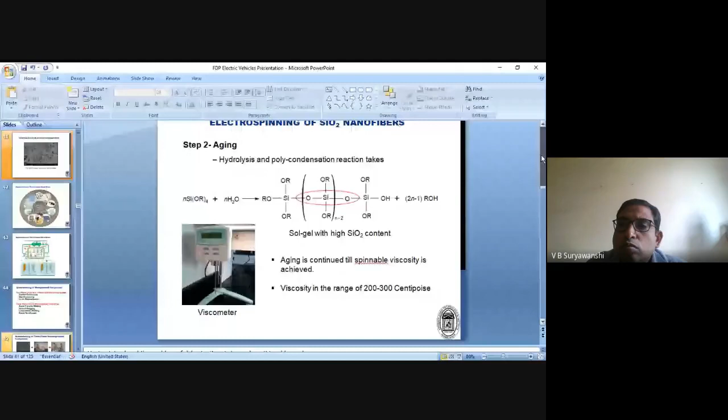Is the screen visible? The screen size and all, is it okay? Yes, sir. Please do the slideshow so that we can see. Okay, slideshow will be better.

So the title is Nano Engineered Composites, and I would try to orient it towards automotive applications. The core is composites. During my PhD studies, I focused on how to nano engineer the original composite materials, normally called fiber reinforced composites or fiber reinforced plastics. This is what the focus of my talk will be.

Basically, I'm going to go through an introduction to composites, how they are designed and manufactured, the various applications, and the current state of the art of composites in automotive engineering. Then the scope for nano engineered composites, how they are manufactured, the challenges, and how they are characterized. And if possible, I'll touch on the design aspect of both composite materials and nanocomposite materials.

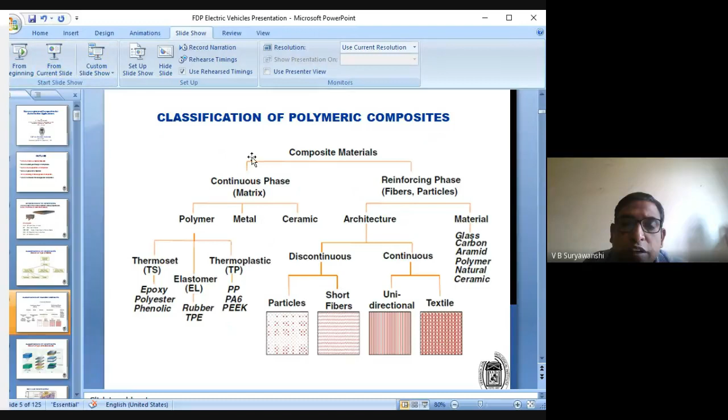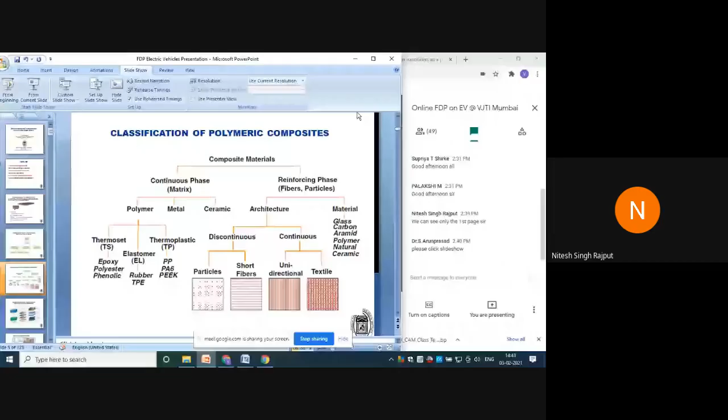Sir, sorry to interrupt. Are you presenting, sir? Because we can see only the first slide, your introduction by Dr. Suryavanshi. Okay, sorry. Maybe I started with the window presentation. Let me stop sharing and redo it. Can you see this now? Yes, sir.

Classification of the polymeric composite, that is the fifth slide. So there can be particle reinforced composites and short fiber reinforced composites. Those are discontinuous fiber composites, or discontinuous reinforcement composites. And there is one category of composites which is continuous fiber composite. The fibers can be aligned in one direction, which is unidirectional, or there can be different orientations, different designs. Those are called textile composites or woven composites.

The continuous unidirectional and textile ones give the maximum benefits of the composites. Short fiber composites, although they are used in many applications, including automobile applications, do not actually realize the benefits of the composite because the fibers are short and the load is not completely taken by the fibers. We'll come to it when we go into the detail.

And there can be different materials also, like glass fiber composite, called GFRP, then there is CFRP, then aramid fiber composites, natural fiber composites. So based on the variety of reinforcement we can also classify. General terminologies are more popular, let us say GFRP, CFRP. Unidirectional is very popular. Then short fiber composites, injection molded composites. Those are some of the main categories of composites which have a lot of applications.

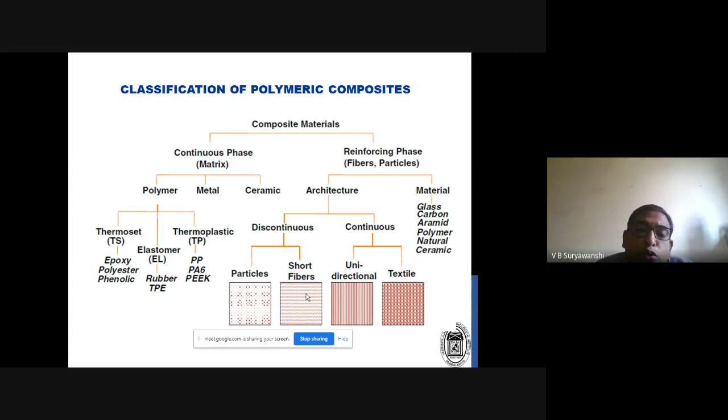So in another way, what is particle reinforced? This is how it will look like. So there is one surrounding material which is called as the polymer, and we have put the particles in that. So that becomes your particle reinforced composite.

Then short fiber, you can see here, the short fiber, chopped fibers are there, which are, let us say, embedded or mixed or immersed in the polymeric resin. Then we probably do the injection molding and get the part. So those are called as the short fiber composites.

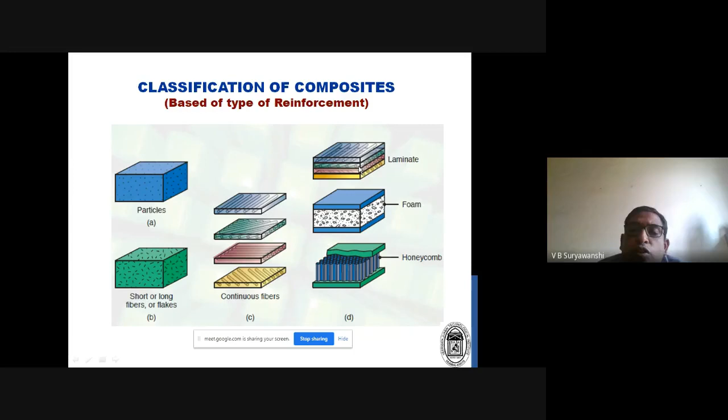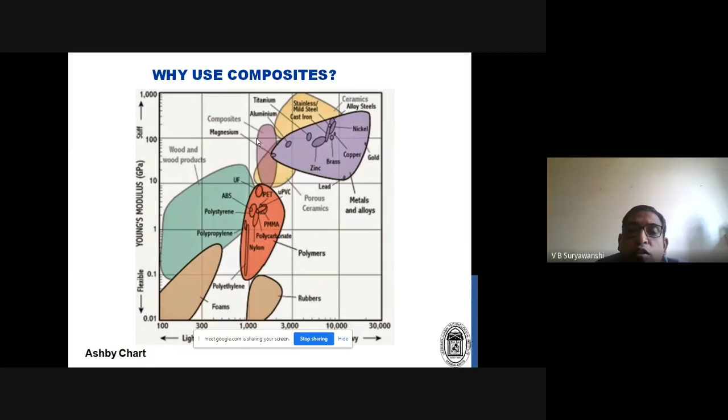Let us say stiffness versus density, strength versus density, fracture toughness versus density. So many charts are there in one of the books written by Ashby. So the concluding remark from this slide is that the composites are strong, stiff, but light. So strength to weight ratio is very high. That is the main advantage of the composite material, and that's why it is used in the aerospace industry and many other industries where they want the best performance and they are not bothered probably about the cost.

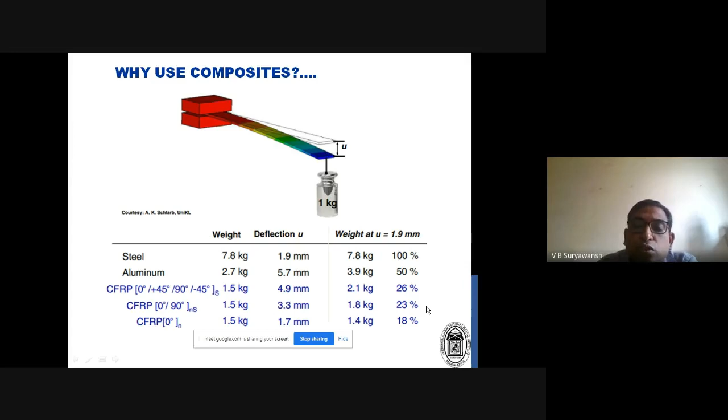Hereafter I'll be focusing only on polymeric composites, and we should know basically what is the role of each component. There are two components in polymeric composite material: one is called the fiber, and another is called the matrix or the resin.

So what the fiber does is take the major load. It provides the stiffness. So stiffness is provided by the fiber, and strength is also provided by the fiber. Stiffness and strength are two different terms, as you might be aware. When we talk about tensile strength, that is nothing but strength, and when we talk about modulus, that is nothing but stiffness. So stiffness and strength are provided by the fiber.

The toughness and damage tolerance are properties of the matrix. Toughness is when something is hit to the material, everything present in that material takes the load rather than just the fiber. So majority of the toughness, because toughness is a continuous failure phenomenon, not a single stage failure phenomenon, that's where the matrix plays an important role. As various cracks propagate, multiple cracks form, and those cracks are generally formed in the matrix. So these are matrix properties.

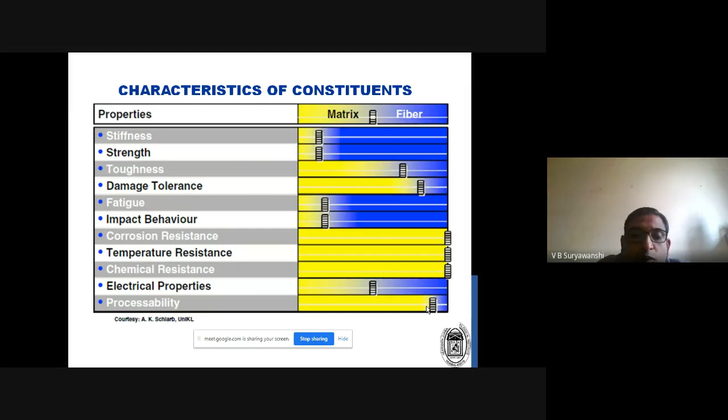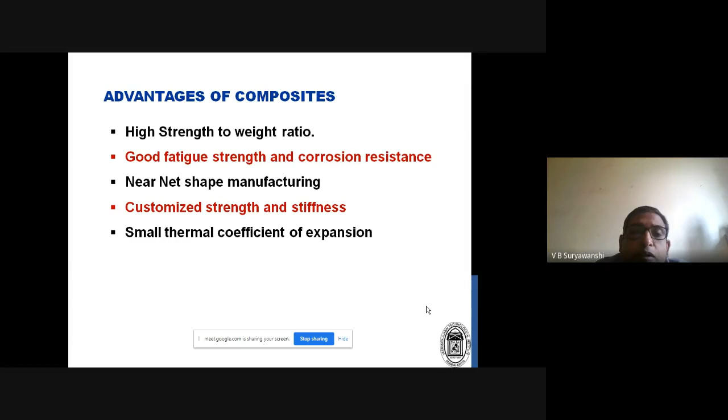So we have already discussed this: strength to weight ratio, fatigue resistance, near net shape - these are some of the advantages, and that's why we go for composite material. What is more important to talk about here is there are certain disadvantages too. Specifically, when you ask why they are not used in a variety of applications, or why they are limited to aerospace application, the first important point is they are expensive and difficult to manufacture.

Carbon fiber composites are really expensive as compared to our conventional materials. The processes also, typically the equipment and techniques - the equipment is costly and the techniques are cumbersome, so we need expertise in that.

Damage usually is not noticed, because steel and similar materials fail gradually, but composite materials fail suddenly and then there is a sudden shock. So steel fails gradually - when you pull it on the UTM, you see continuous deformation and then neck formation takes place, and after that we come to know it's going to fail. Whereas in composites, the cracks propagate and then suddenly they fail.

Then hygrothermal effects - if it is subjected to thermal effects and water effects, it has issues with that, which we have to address. Lower strength in the transverse direction - what this means is, let us assume a reinforced concrete beam: along the direction of the steel rods, the strength is very high, and across the direction it becomes very less. So that is called lower strength in the transverse direction.

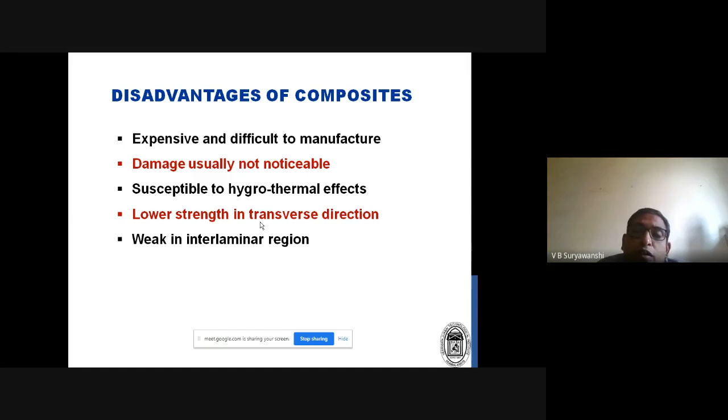And they are weak in the interlaminar region. This is particularly applicable for laminated composites. What we do is make a component layer by layer, so when two layers are joined together, obviously the weakness will be at the intersection. That is what is called the interlaminar region.

Having covered all advantages and disadvantages, let us look at the applications. There are a variety of applications. In construction, bridges are being made using composites.

In the sports industry, a lot of equipment is made of composites, because mostly high-performance equipment, like tennis rackets, are made of carbon fiber composites.

Then automobile industry, yes, there are many applications. We'll discuss in detail exactly where they are used and in what sector of the automobile. In sports industry, as said, a lot of composites are used. Then in the boat industry, a lot of boats or ships are made using composite material.

In sports cars, there are a lot of applications. Obviously Formula One and similar cars have a huge amount of composites in them. Wind turbines, aerospace - those are conventional applications where composites are used.

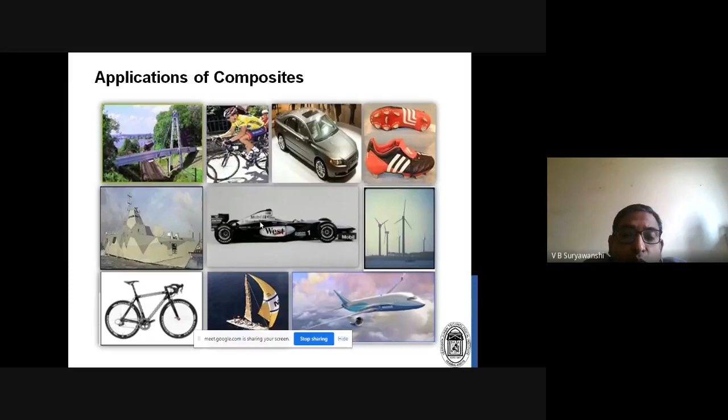Coming to our main focus, the automobile industry - a lot of composites are used here too. But considering their cost, at this point they are mainly used only in high-end cars, let's say racing cars, where maybe about 50% of the material is composites. Whereas in passenger cars and low-end cars, it is not possible to use them at this moment.

So these are applications in high-end cars. Bumper beams of some cars are made of carbon fiber composites. The crash box is a typical application where high energy absorption is needed - energy absorption in the case of composites is very high.

Flat structural parts can be easily manufactured with sandwich structure. Sandwich structure has the advantage of very good bending stiffness. Bending stiffness is required for flat parts, and load carrying capacity is also very high in the direction perpendicular to that flat surface - that is the specific advantage of sandwich structure.

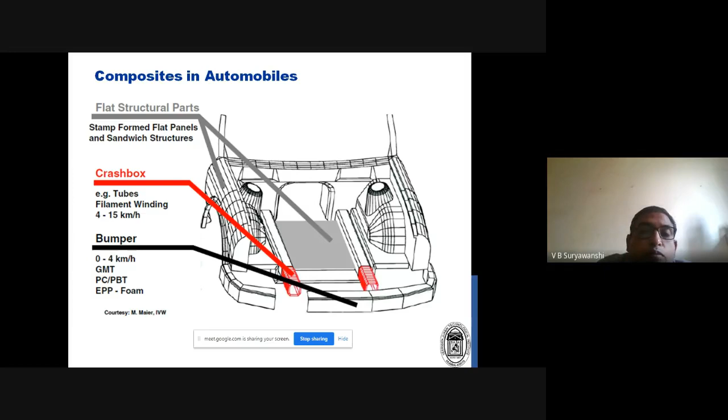You can see here all these cars where composites are being used - BMW, Nissan - they are not bothered much about cost. They are more focused on performance.

There are two main categories of composites used in the automobile industry. Most of what you see here are called continuous fiber composites. The safety seat and side door structure, as seen in the BMW, are made out of continuous fiber composites.

When I say continuous fiber composites, the fibers are in the form of a mat, like our cloth, and a layer-by-layer structure is made to create a composite. That is one category giving the highest or best possible performance among composites. The second category is short fiber composites.

Those are used in many cars because these parts are injection molded, and injection molding is comparatively a very cost-effective process compared to other composite manufacturing processes, which are typically made in autoclaves and big ovens - those are costly processes.

So when we talk about composites in automobiles, remember that for structural applications, such as the BMW safety seat and door structure shown, there is cost involved. However, the second category, injection molded parts, we can still work with, and we should definitely go with such composite parts in the automotive industry.

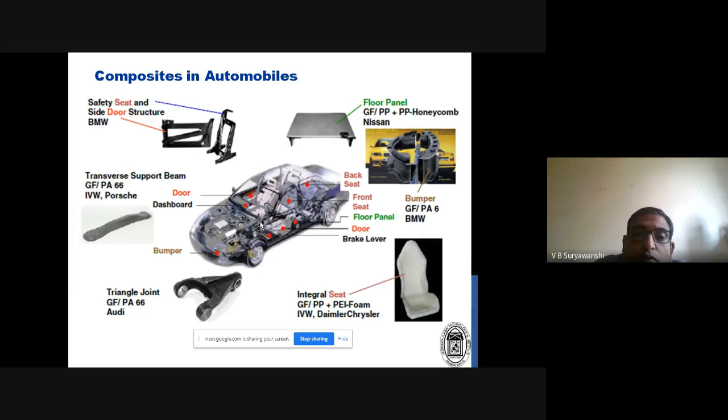This slide shows various other parts made out of composite. Door panels - a lot of manufacturers are going for this. Then the dashboard, typically molded parts, so injection molded short fiber composites will be used here.

Under body panels - almost 11% of parts are used there. Then noise encapsulation, under-hood components, door sills, tire holders - all these areas where plastic is currently used have great scope for short fiber reinforced composites.

Other parts, like body panels, can go for long fiber composites, provided the manufacturers are able to minimize or cope with the cost in the car.

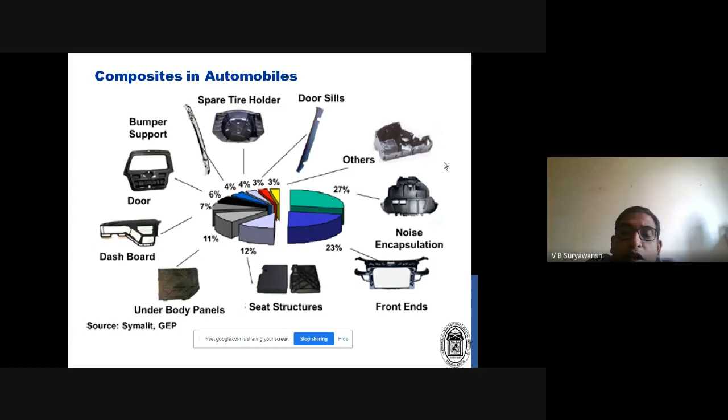To summarize, why it is so important under the current scenario for the automobile industry to look at composite material: lightweighting is one of the top priorities of the automotive industry. If you can reduce the weight of the car, you can save on fuel, and that makes it a more attractive option for the manufacturer or the customers. So lightweighting is the number one challenge for the automotive industry, and composite is the most possible solution for that.

In similar fashion, when you are going for electric or hybrid vehicles, again you want the weight of the car to be less. So lightweighting is one of the major focuses of all automotive developers and manufacturers. When we talk about lightweighting, one of the best candidates is composite material. But there are challenges, as I said. We'll focus on those challenges and talk about possible solutions in the next few minutes.

So when you want to suggest possible solutions, let us first understand what are the problems and what are the processes. First I'll talk about the manufacturing of composites, explain what the challenges are and where the cost is involved, and then we can suggest possible solutions for them.

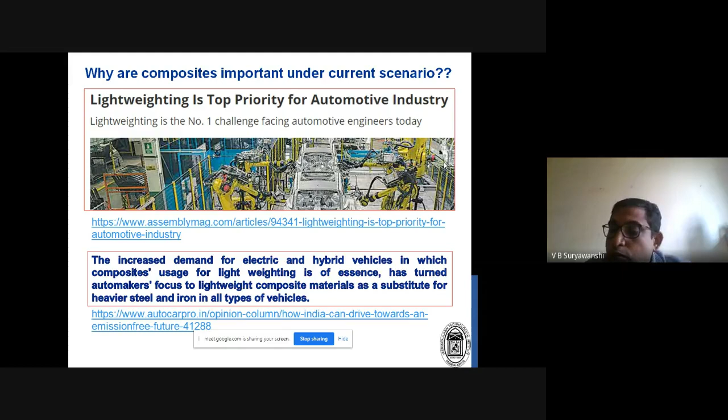So we mix them together, and along with that we want some kind of reinforcement, like in reinforced concrete. We have the concrete with us, and then we need reinforcement in terms of steel rods or any steel material that is there.

With that we can prepare SMCs. SMC is nothing but if you mix the chopped fiber with the resin and make a sheet out of that - a semi-solid sheet, we generally call it - and then we make a composite out of that using compression molding or any type of pressing operation. So that becomes the composite.

Or if you are using long fiber composite with the resin, we make a pre-preg. Pre-preg is similar to what in our general terminology we call the half-cooked composite. We mix the resin with these fibers, and we do not heat it to the final stage. Instead we heat it to, let us say, 50%, and at 50% we save that resin in the half-cooked format. Then when you want to make a composite out of it, we finally heat it to its cure cycle or cure temperature, and then we can make a composite.

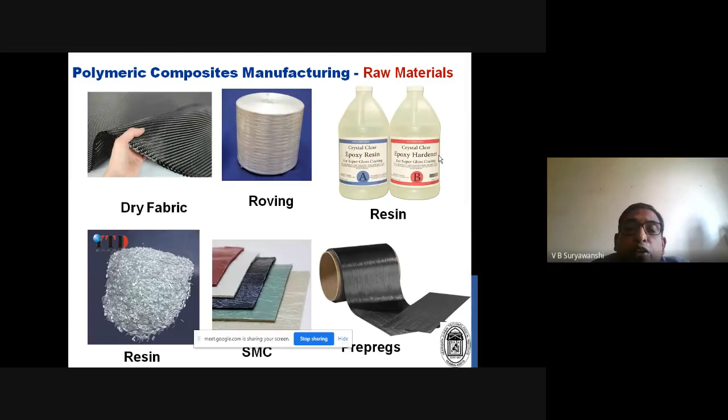The film is made of the resin or the polymer, whatever you want to use there. These two things are pressed against each other. So finally, the final product will have the film, and in the film we have reinforcement in terms of the chopped fibers. That becomes your SMC, sheet molding compound, as it is called.

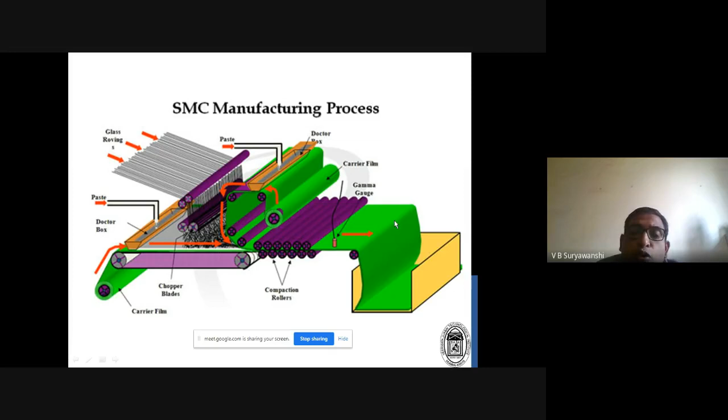So prepregs are manufactured like this, a simple process, but we need a lot of chemical control there because we don't want to cook it beyond a certain limit, and that chemical and heat treatment is a very important aspect. So prepregs are manufactured by very limited manufacturers because the chemical control required is very high in this case.

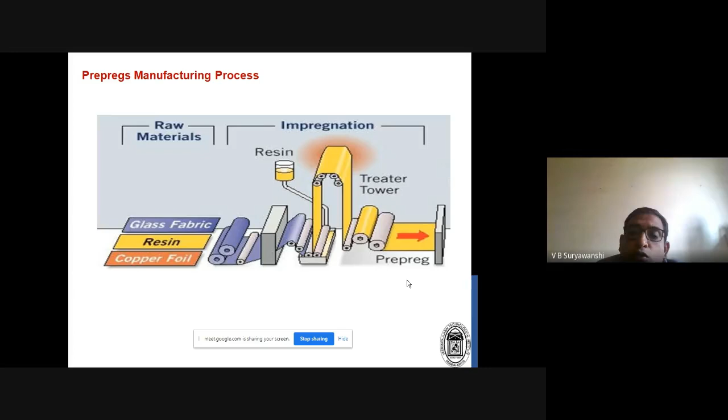In the pultrusion process, we make a long part and there is a die. Suppose you want to make a pipe, you could go for pultrusion, but instead of a pipe, let's say a rod. Most pipes need strength along the radial direction, whereas pultrusion parts specifically have strength along the length direction. So pultrusion is used for beams, rods, poles. All those things are made by the pultrusion process.

And then there is injection molding, a standard process used in other industries as well, and mainly used for manufacturing reinforced plastic composites for the automobile industry. Injection molding is a very common manufacturing process for automobile parts. There is a resin, they mix in short fibers or particles, and then, say we want to make a dashboard, we'll have a mold of the dashboard shape, and it can be made using reinforced polymer or short fiber composite material.

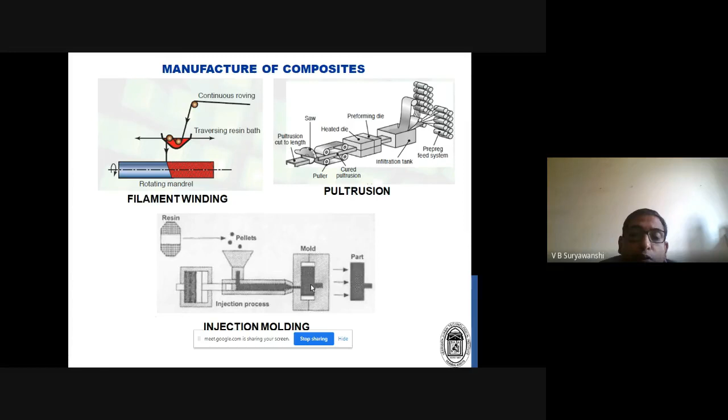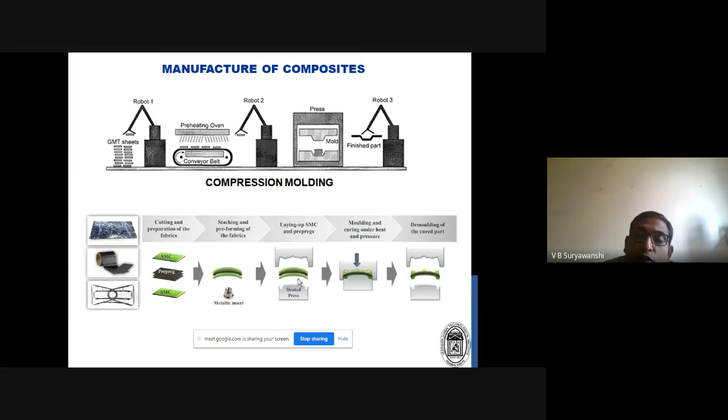One of the best advantages of composites is tailorability; we can customize it. The strength can be customized very easily. If you want strength in a particular direction, we can align the fibers in that direction. If you want strength at a particular level, suppose in the beam you want strength at the top and bottom, we can use the stronger material there because we are building a layer by layer structure.

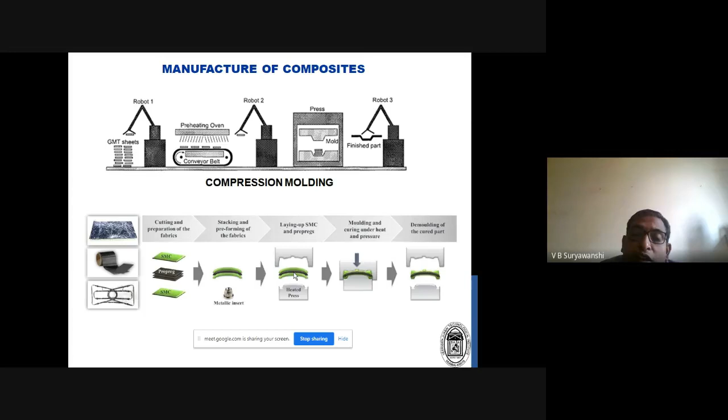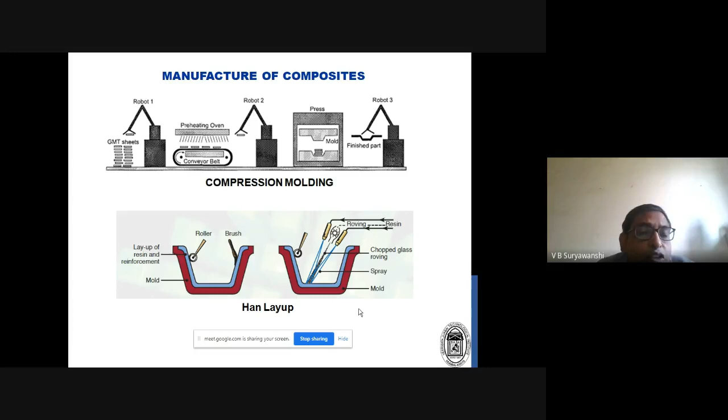So whatever fabric you want to use, or the chopped glass roving, based on whether you want to go for the chopped fiber composite or the long fiber composite. And then with the brush or roller we can just paint it with the polymer or the resin. These parts are used in many, let us say, low-end structural applications. When I say low-end structural application, these parts are not subjected to very high strength, or they are not the

main structural members. So if there is a little bit of an issue in the manufacturing, let us say there are voids, we are not always sure that the resin will reach everywhere when you are doing it with the paint or the brush. So there can be some discontinuities and all those things. So hand layup parts do not possess much strength as compared to the other manufacturing processes.

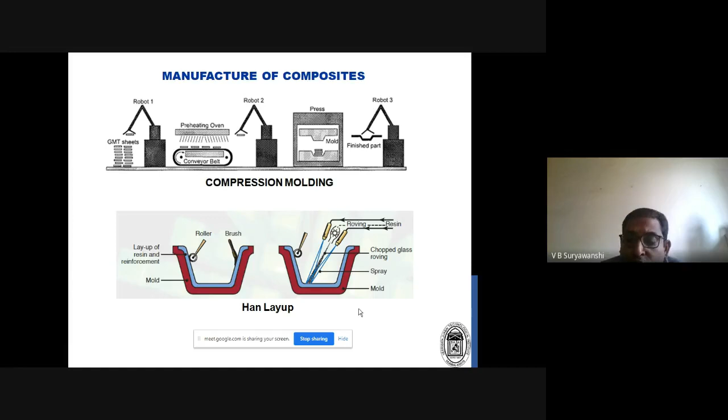So basically, it is an oven plus pressure equipment. It can undergo pressure, so a lot of pressure can be there to compress. So compression is the main factor when you want to have high strength composite applications, because we can apply the pressure there and then all the voids or the air comes out of the mold. Generally we have a closed mold and then we can take out the air from that.

So for this kind of application, pressure is required, and if you want to have a huge oven with very high pressure, the energy consumption for such equipment is very high. So autoclave is very costly in terms of energy consumption and the original cost. So that's why this is specifically used in the aerospace industry, and probably some high-end car manufacturers, let us say sports car manufacturers, who want very high performance, so they can go for such a costly manufacturing process.

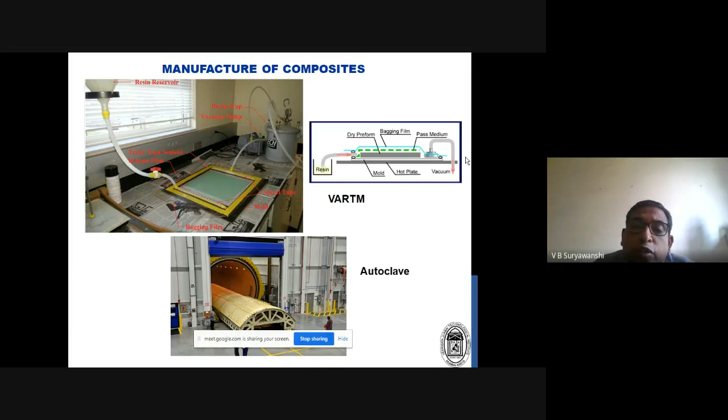Next process, we just want to compare it with the VARTM or the RTM. RTM is a slightly different version of the VARTM. Instead of a vacuum, they are applying pressure there to infuse the resin. So a high pressure resin pump is used, and whatever is the cavity, that is filled with the pressure. In case of the vacuum, the resin is pulled into the mold cavity.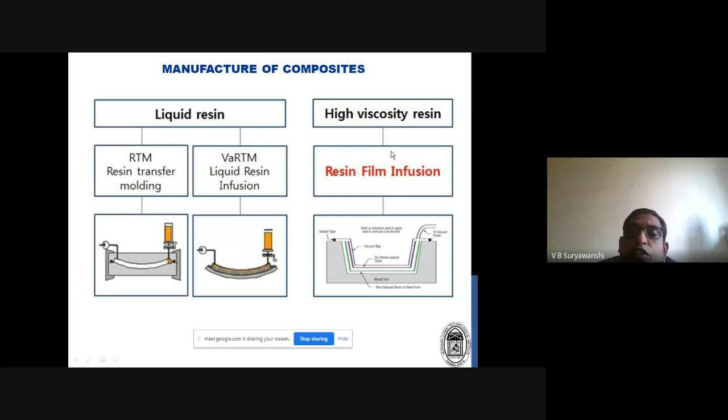Okay, so these were some of the general or most popular processes. There can be a variety of other variants. Now, what commercial manufacturers or product developers are doing is coming up with solutions, especially for automotive parts, where some cost reduction is done compared to the cost for aerospace. So they are coming up with standard solutions or individual applications by themselves. So this is one of the product developers who provides the material for car manufacturers.

What they do is provide prepregs. Prepregs are provided, and the mechanical performance is equivalent to the autoclave. That is the major thing when we are going for composite applications, especially long fiber composite applications for the automotive sector: mechanical performance similar or equivalent to the autoclave. Autoclave, as I said, is used in the aerospace industry, is a costly process, and the main reason they are getting performance is the process. Autoclave eliminates all the manufacturing defects, and that is what is required in applications such as aerospace. They don't want any chance of failure.

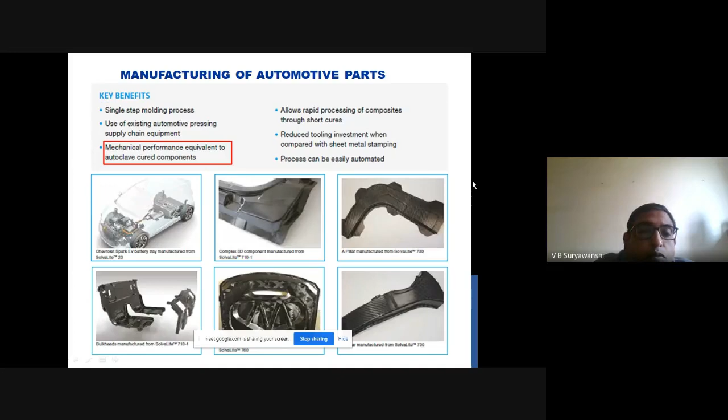But now other approaches and processes are being developed so that we can get similar performance. One of them is prepregs with certain modifications, let us say in terms of the cure cycle, the polymer that is used, or reinforcing the polymer with some additional material. So modifications are being done to come up with solutions for the automotive sector. These are some of the parts made of composites for the car. Car doors are manufactured with composites. These are real applications, used in some cars already. But the cost is obviously high, as you can see with the BMW GTS. The cost is involved with the composite material here.

Fine. So in terms of cost, if you compare relatively with the aerospace application, on a scale of 0 to 100, we can take the cost of the aerospace component to be 100, and molded parts, not long fiber composite parts, can be around 10. So currently most applications, typically in mid-range cars, are focused only on injection molded parts. So can we increase the strength of the injection molded plastics used in the automobile sector with some kind of nano engineering? We'll talk about nano engineered composites later.

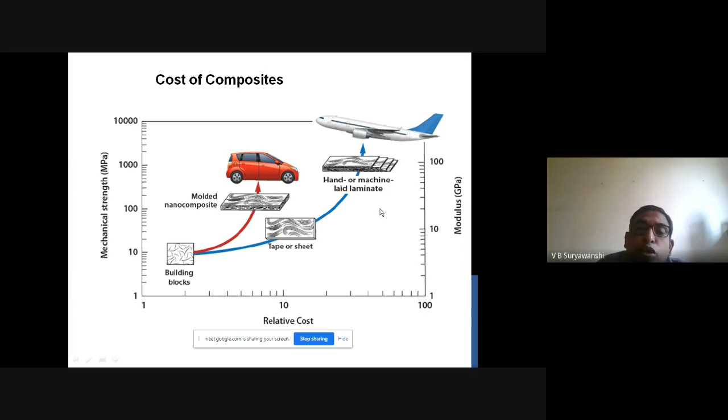Nano engineering means adding some kind of nanomaterial to the plastics and increasing the strength of the existing plastic used in the automobile. Mostly the under the hood components or the dashboards use a variety of plastics. Nylon 66 or nylon 6 is one of the most commonly used, and people are trying to improve their strength. So the cost is not much; it will slightly increase. But if you really want the maximum benefit of the composite, we'll definitely have to go for long fiber composites, like the door panel. The door panel is made of long fiber composite here.

Okay, so what we discussed so far is, yes, there is a scope for composites in the automotive sector. Currently, they are mostly used for high-end cars, where the cost can be borne. In low-end or middle-end cars, the composites used are typically short fiber composites, wherein there is not much cost involved in changing from the current plastic, let us say a polymer like ABS, to the reinforced plastic. Reinforcement is added in terms of some kind of fiber, chopped fibers. So that's the current scenario in the automotive sector.

So what is the solution? If you really want to go for composites, or improve the penetration or utilization of composites in the automotive sector, what are the possible solutions? That's what we want to talk about here. In the first part we discussed composite materials, or polymeric composites, where they are used currently, and what the limitations are. Nano engineered composites is one of the solutions proposed here.

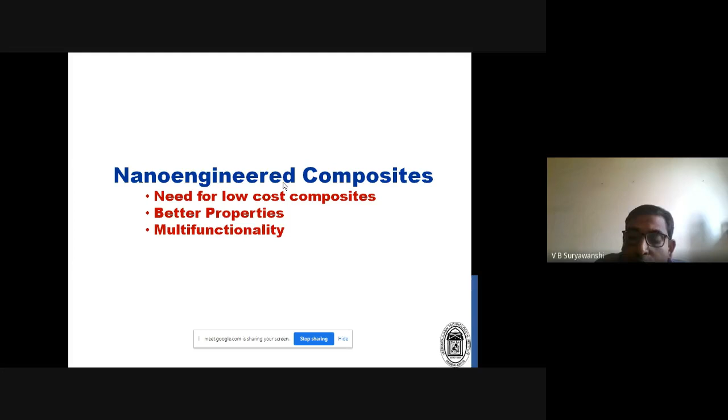I think we are left with another 20 minutes probably. Yes, sir. Yes, sir.

I mean, the stage is very clear. We have made a statement that there is a need for improving the properties and bringing down the cost. That is the basic requirement, and that's where we are looking at nanomaterials as the prospective solution. When you talk about nanomaterials, you always start with what is nano, right? They are very small, 10 to the power minus 9 meters, so 1 meter divided by 10 to the power 9. That small dimension is 1 nanometer.

And you can see how far it is. Let us say the head of a pin is 1 to 2 mm. We divide that by a further 1000, and then again, and we come to 1 nanometer. So in the nanometer range, the dimensions are really small. The diameter of human hair can be compared; it is in terms of microns, 10 to 50 microns. A micron is 10 to the power 3 nanometers. Sorry, millimeters will be divided by 10 to the power 6, and here 10 to the power 3.

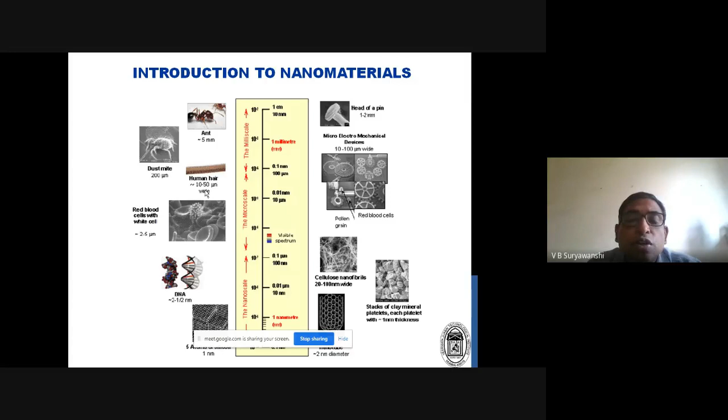So a lot of attention has been given in the last 20 years to them, and there is a lot of spending on research. And after 20-25 years, some good results are coming out. They are typically classified as 0-dimensional, 1-dimensional, 2-dimensional, or 3-dimensional. So 1-dimensional: its diameter will be in nanometers, but the length can be in millimeters or centimeters. 2-dimensional: any two dimensions, like width and thickness, can be in the nanometer range. In the case of a 3D or bulk material, nothing is in the nanometer range, so that is bulk material. Zero dimension is a particle, which has all its dimensions in the nanometer range.

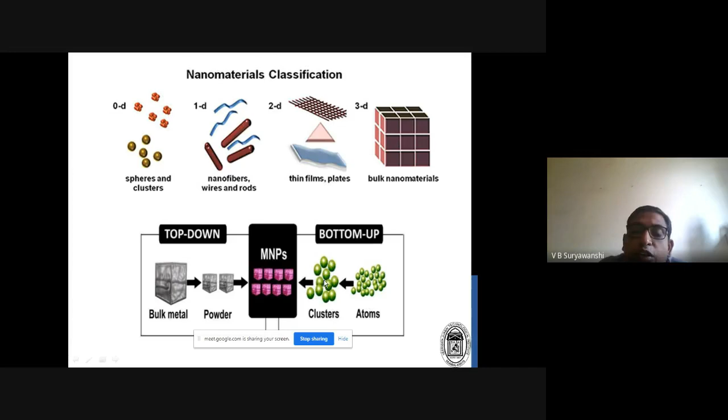How are they made? They are made in two different fashions. Either we take bulk material and crush it into fine particles, or we join individual atoms to make a nanometer scale object. So these are the top down and the bottom up approaches.

Why nanomaterials compared to other materials, let us say bulk material? If you look at carbon nanotubes, the tensile strength is 30,000 megapascals. Steel is about 1000 megapascals. So 30 times the strength of steel. That's the beauty of these materials. There are many other materials which may not have the same strength as carbon nanotubes, but they are better than their bulk counterparts. If I make a polymeric rod of 1 centimeter diameter, and the same thing at 50 nanometer diameter, the smaller one will be stronger in terms of tensile strength or tensile modulus, because due to the size effect there is purity involved and there are fewer defects.

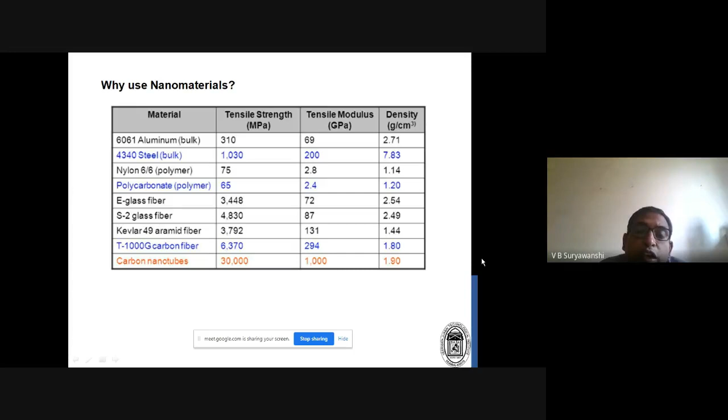So nano engineering or nanomaterials can be used for a variety of applications. There is a big list, and most of them these days are looking at functional applications, like wear resistance or anti-reflective coating. The part will give you strength as well as some additional properties. Electrical conductivity is a functional application. Our focus here would be on structural applications: how do we get additional strength with the help of nanomaterials or nano engineering?

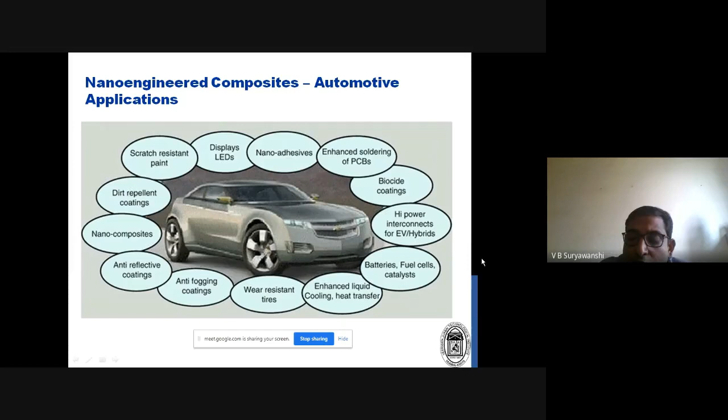In the automobile sector, nano engineering started quite early, in the 1990s. The specific material used there was nano clay. Nylon 6 was reinforced with nano clay, and they got a very good improvement in strength and stiffness. In most American cars and high-end cars, the injection molded nylon plastic parts are reinforced with clay, and that has been in practice for a long time. Similarly, polypropylene can be used along with clay. Nylon 6 with carbon nanotubes is used in some vehicles, and many nanocomposites are being used in Chevrolet cars.

So although nanocomposites do not have that much market share or utilization in all cars, they have become practical. Initially, when they started 25 years ago, they did not know the scope or actual applications of nanocomposites or nano engineering, whether they would be used or not. But applications have been developed, and it has become reality after 20 years.

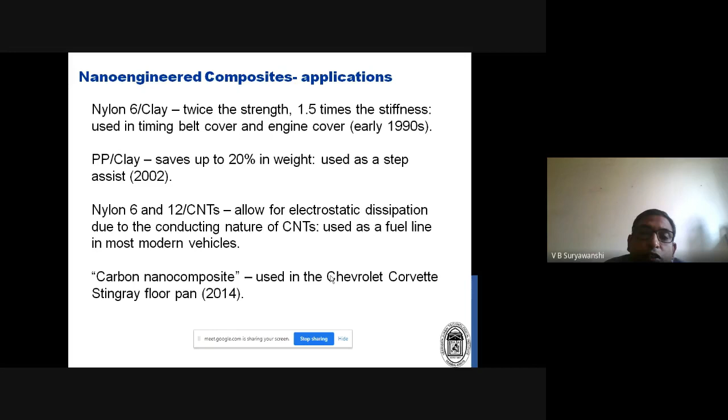Okay. So this was general so far. Let's get specific with how we can use nanomaterials in composites and how we can improve the properties. As we said, there is a need for improvement in properties, and a need for alternative low cost manufacturing processes. We'll focus on these two things in the next few slides to come up with possible solutions wherein we can use nanocomposites in many automobiles.

So how do we manufacture nanomaterials? Typically we are talking about nanofibers here. Electrospinning is the process used, a very simple process. In the syringe there is a polymeric liquid. We create a large voltage difference between the syringe and the plate, which is the collector. Due to that, the liquid is pulled into small fibers. Those fibers get collected, and we call them electrospun fibers. A number of polymers are being electrospun.

So the beauty of this process is it's very easy compared with any other nanomaterial manufacturing processes. We'll see thousands of papers are there in the last decade, and applications of electrospun nanofibers are numerous. So it's a very easy process, and those who want to start research can definitely go for such a simple process.

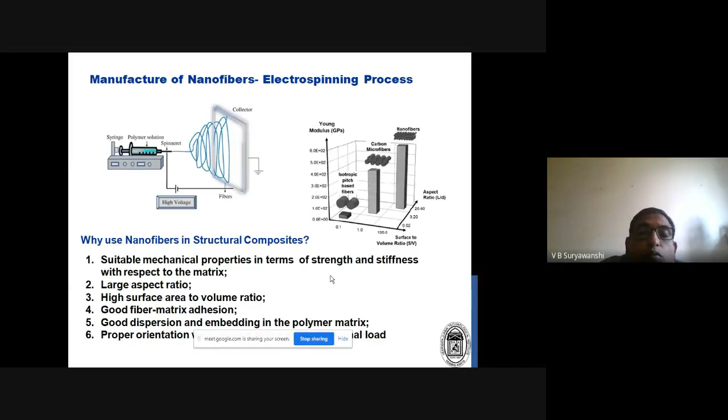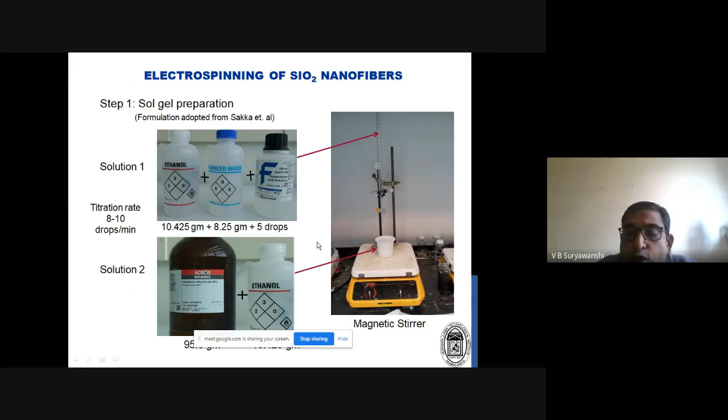Specifically, how this is manufactured - the electrospinning process - is what is shown here. We make up what is to be put in the syringe, that is the solution we make, and then that solution is electrospun. There is a chemical reaction involved with that, and finally we can see the actual manufacturing process here. On the sheet, on the collector plate, we can see that there is a deposition.

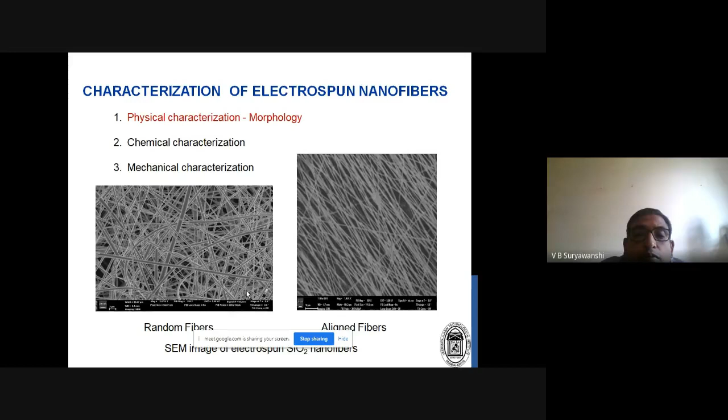So this is the SEM image of electrospun glass nanofibers. Now these nanofibers, as I said, are used in a variety of applications. Typically, if you start with scaffolds - scaffolds are nothing but for bone. If you want to create an artificial bone, we need some structure to hold the surrounding soft material, and that is called a scaffold. So scaffolds generally provide structural support for any application.

Then energy storage - solar cells and electrospun nanofibers are extensively researched as high energy storage elements. Sensors, then in biomedical applications, dressings and so on. So what is the advantage here? The electrospun nanofiber can be made out of a variety of materials. And then we can probably add some medicines into the nanofibers just by mixing them in the liquid, and we make a wound dressing or wound pad out of that.

So that can be easily used to treat wounds. Wound dressing is a huge application. Fuel cells, batteries, solar cells - a whole variety of applications. If you see the research on electrospun nanofibers, it is growing like anything. And typically the manufacturing process is easy, which is why people find it very useful.

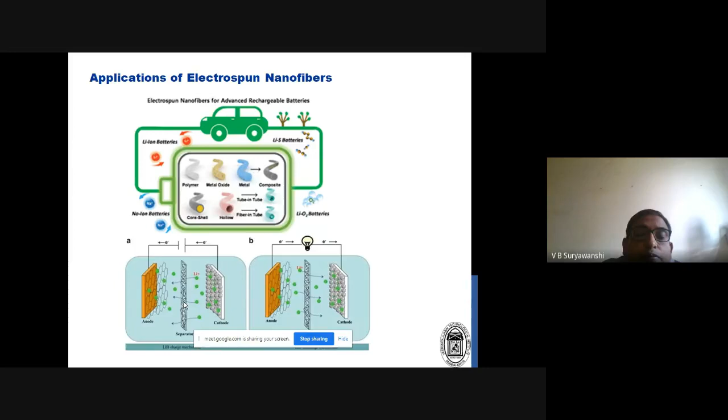Okay, so in the next few slides, what I'll explain is how these nanofibers can be used in the manufacturing of the composites. So there are two types of composites we are manufacturing.

Two-phase composites, wherein these nanofibers will be mixed with the polymers - we call it the two-phase composite. And the three-phase composite, these nanofibers will be mixed with the fiber reinforced composites, which already has regular size fiber and the polymers.

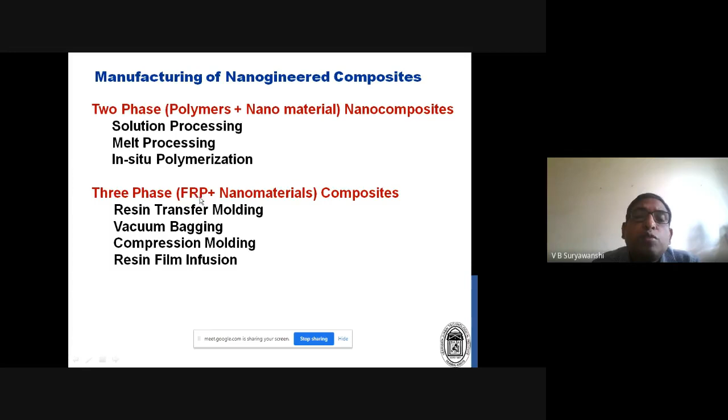So we can chop these nanofibers with the help of some kind of chopper. We can do the solution mixing - there is a liquid there to mix with the solution, let us say ethanol is used here. It is called the solution mixing process.

After chopping, we can get some fibers like this. Then we mix up with the polymer, let us say epoxy resin, and finally we get a modified resin. So this is called the nano engineered resin - we have mixed the nanofibers with the resin.

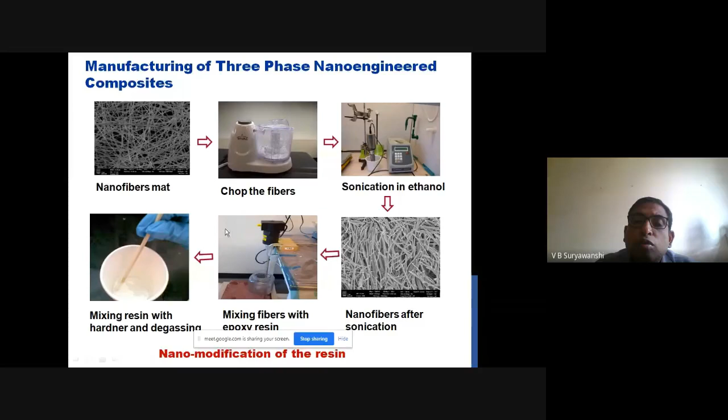What will happen? Nanofibers are strong, the glass material is strong, it will improve the properties of the resin. Polymer generally is weak among the fiber and resin. By adding the small nano size fibers to the polymer, we are improving the properties of the resin.

Now that improved resin is used in the polymer fiber reinforced composite. So what we do, the fabric is laid up here, fabric layup, and this modified resin is given as the input, and it mixes with this fabric and we get a composite like this. So this is called the composite using the nano engineered resin.

What is expected? Due to the improvement in the properties of the resin, we should get better performance or better mechanical properties for the composites. And that is what happened here.

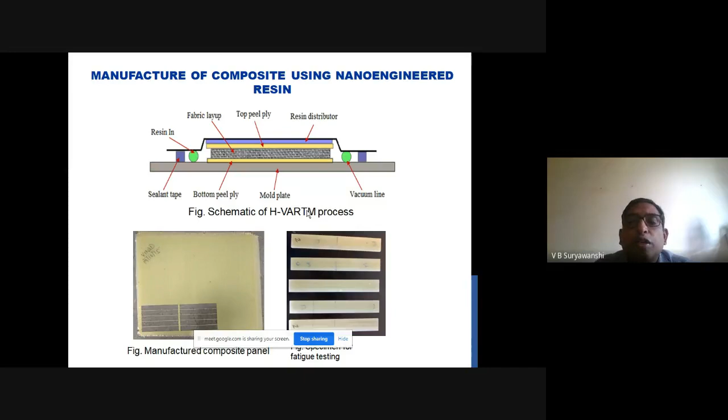So if you can improve this performance further, let us say if you use stronger materials like CNT, carbon nanotubes, and the process that we used is very simple - this process is the H-VARTM process. It comes under the low cost manufacturing process. So with the low cost manufacturing process, go for the nanomaterials and get performance comparable with the high cost manufacturing process. That is the approach for the nano engineered composite.

In another application, instead of chopping those fibers, we simply put the electrospun nanofiber mat. The mat is nothing but like a cloth, correct? So we deposited it on the collector plate, and that is how we made a nanofiber mat.

If you can put it on the resin film, what will happen? These two things will join together, and then there are the various prepregs. Prepreg is nothing but the one which has resin and fiber both. So in between the two layers, as we had mentioned earlier, the composite is generally weak.

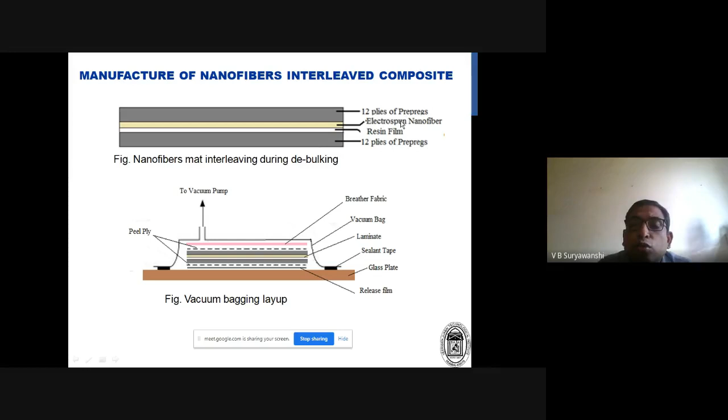So if you can reinforce that region with the help of the nanofibers, we should be able to get improved performance. So how do we check the performance?

Treatment is something we do to have proper bonding with the polymer. This nanofiber mat is chemically treated - some chemical agent is applied to it, so that is called the silane treatment. So without treatment and with treatment, that kind of experiment we had done.

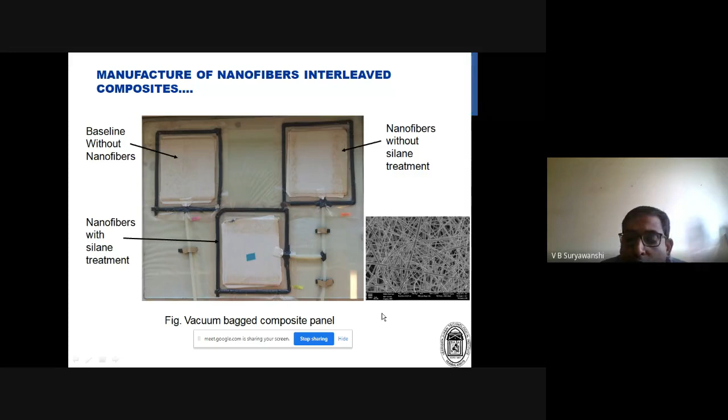And then we made 3 composites and we tried to understand whether it improves the performance. What kind of performance are we interested in? Whether they separate easily, whether their separation strength is improved.

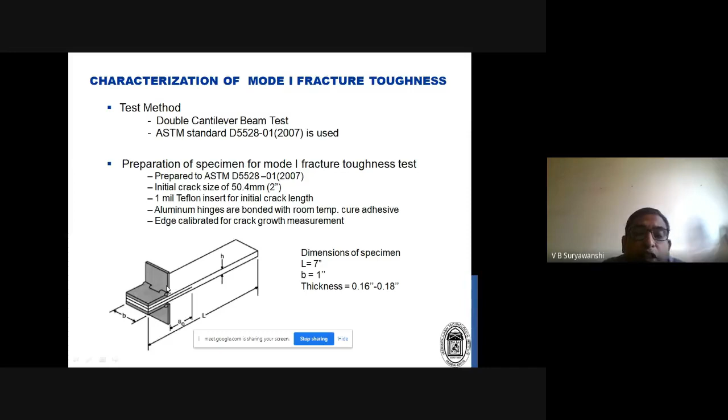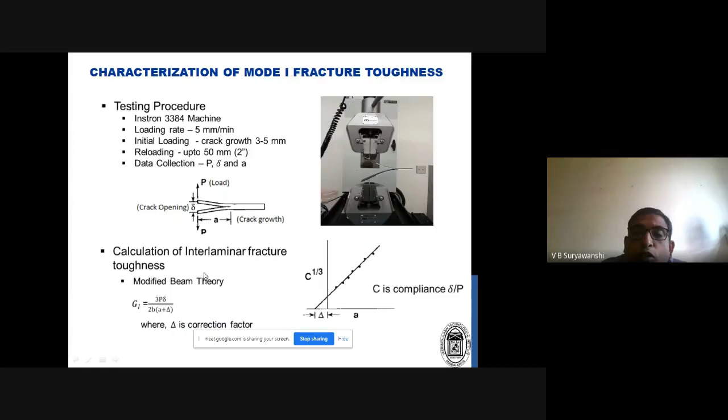This shows that if you use the nanofibers, we can improve the separation performance. These composites will not delaminate easily. So there is scope for better properties, and we can go for a variety of configurations and materials to get better performance.

Lastly, what we saw is when you put those dry fabric electrospun fibers in between the two layers, there is no proper wetting of the nanofibers. So how do we solve this problem?

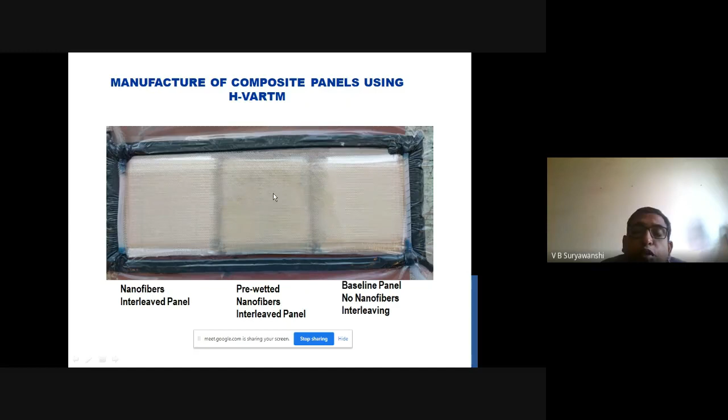What we had done is we applied pre-wetting. Pre-wetting means this nanofiber mat was soaked in the resin, and that improves the resin infusion, which helps in improving the performance. The pre-wetted fiber showed better performance.

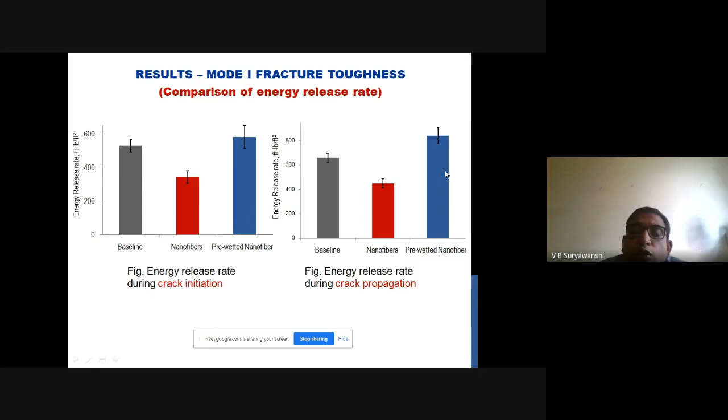With pre-wetting, we can see good fracture toughness. Fracture toughness is how quickly it opens, or how much energy it takes to open up or separate. So the pre-wetted one performed better. These are small solutions that we can suggest through research for improving the performance.

Nanomaterials are very powerful and useful, but unless we develop the manufacturing processes, the actual realization of their benefits will not come into picture. So you have to go for small experimentations, realize their benefits, and develop processes for the nano engineering of the existing component.

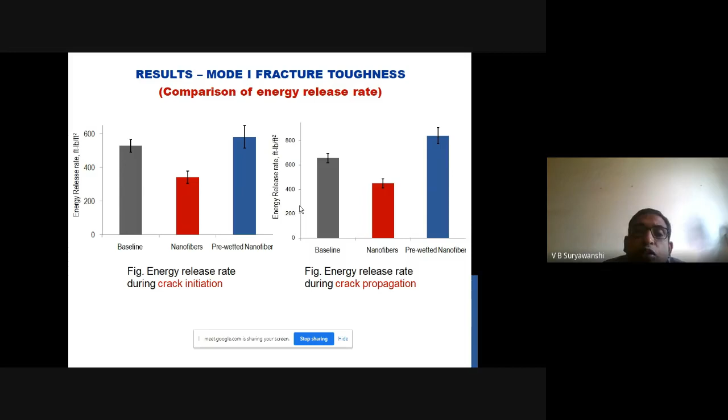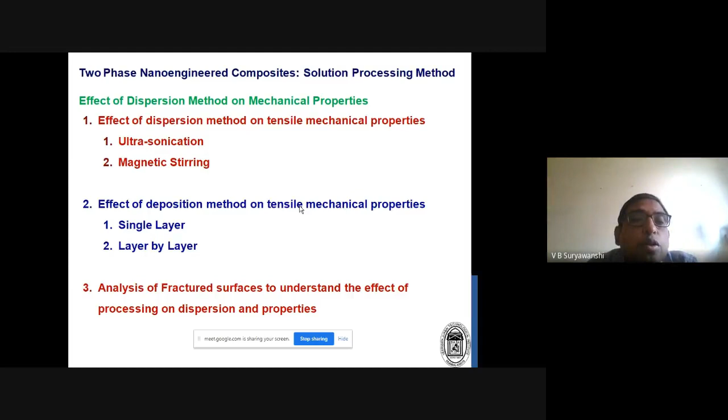I think we are done with the time. What I would like to conclude is we can use electrospun nanofibers to improve the performance of composite materials, like glass fiber composites, which we focused on here. This improvement can help medium range automobile manufacturers go for composite materials, thereby reducing the weight of automobiles. Reduction in weight will let us go for electric vehicles, or reduce the cost of the existing car. So these are some of the benefits of nano engineering or nanomaterials.